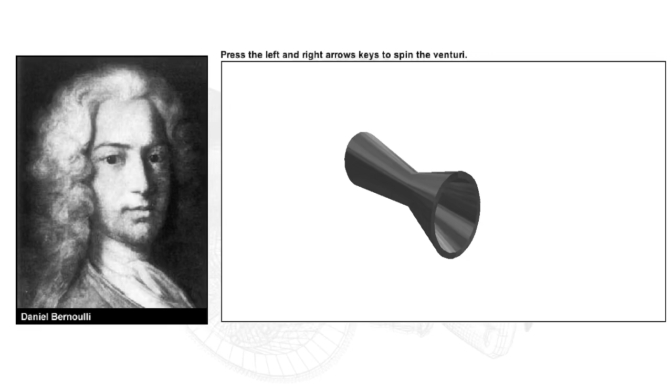Daniel Bernoulli, a Swiss scientist who was born in 1700 and died in 1782, discovered certain properties relating to fluids in motion. He expressed these properties in the mathematical statement that the total energy in a moving fluid or gas is made up of three forms of energy: the energy due to its height or position, the potential energy, the energy due to its pressure, and the energy due to its movement, the kinetic energy, and that in a streamlined flow of an ideal fluid, the sum of all of these is constant.

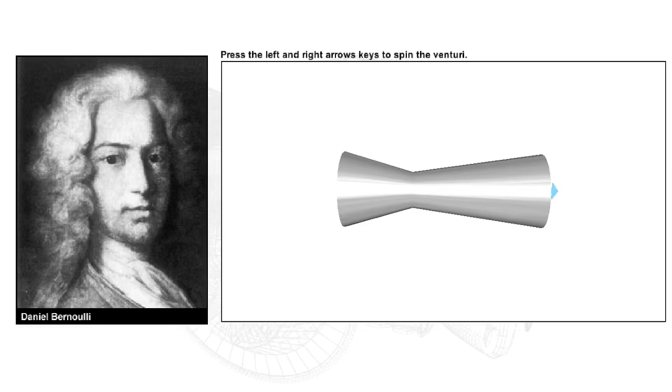If we just consider airflow as opposed to any other fluid or gas flow, the potential energy in that airflow can be assumed to be constant. Thus, we can modify the previous statement for all practical aerodynamic purposes by saying that the kinetic energy plus the pressure energy of a smooth flow of air is always constant. Thus, if the kinetic energy is increased, the pressure energy will drop in proportion so as to keep the total energy constant.

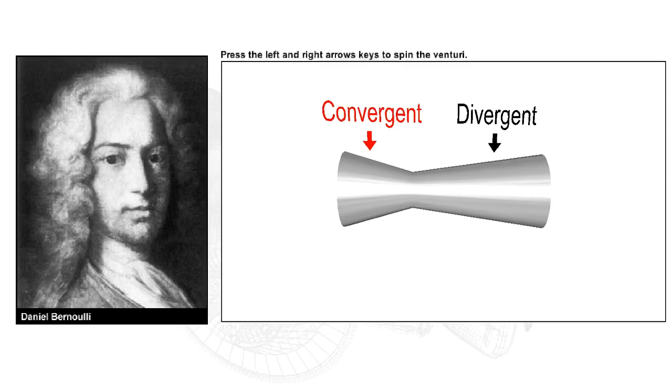A practical application of Bernoulli's theorem with which the pilot should be familiar is the Venturi tube, sometimes called a convergent-divergent duct, an example of which is shown here. The Venturi tube has an inlet which narrows to a throat, and an outlet section, relatively longer, which increases in diameter towards the rear.

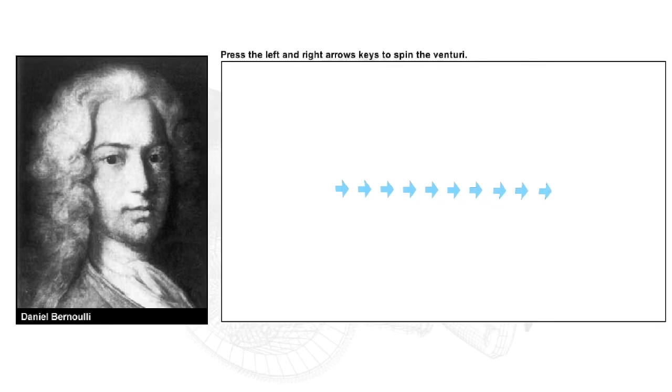For a flow of air to remain streamlined, the mass flow passing a particular point in a set period of time must remain constant. So, if a Venturi tube is positioned in such an airstream, then, for the air to remain streamlined, the mass flow through the Venturi must remain constant.

The mass flow is dependent on the area times the density times the velocity, and is a constant. This statement is known as the continuity equation.

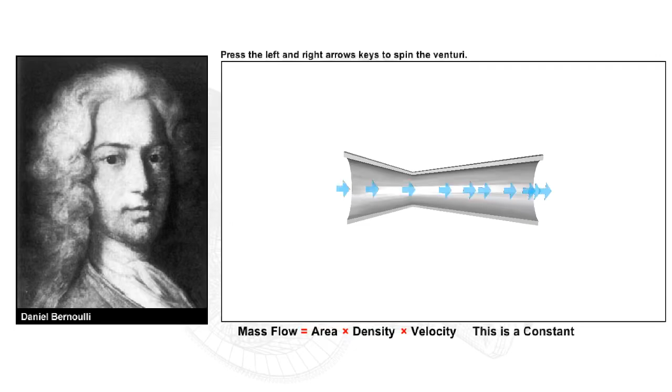Assuming that the density remains constant, for the mass flow to remain constant and still pass through the reduced cross-section of the throat of the Venturi, the speed of flow through the throat must be increased. Bernoulli's theorem states that this will bring about an accompanying pressure and temperature drop.

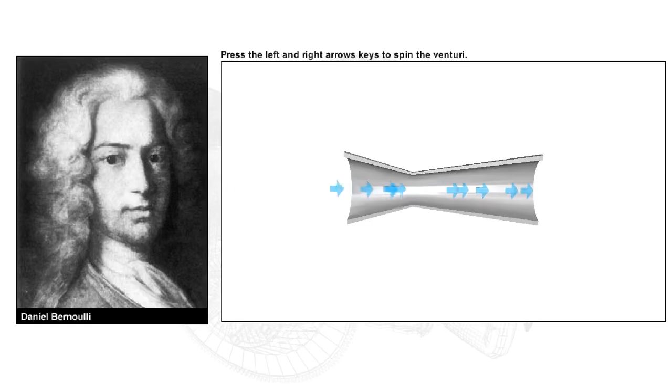Gases behave differently from the other two commonly studied states of matter, solids and liquids, so we have different methods for treating and understanding how gases behave under certain conditions. Gases, unlike solids and liquids, have neither fixed volume nor shape. They are moulded entirely by the container in which they are held.

There are three variables by which we can measure gases: volume, pressure, and temperature. We'll discuss two of the so-called gas laws which are most pertinent to the operation of the internal combustion engine: Boyle's law and Charles' law.

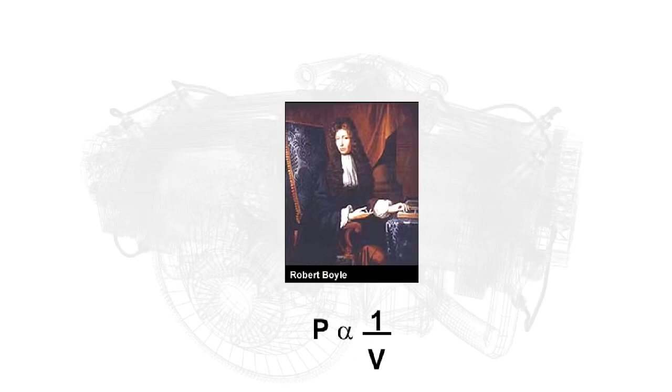Robert Boyle was born in 1627 in Ireland. He made important contributions to physics and chemistry, but is best known for the law which was named after him concerning an ideal gas.

Boyle's law states that, in a gas which is held at a constant temperature, the volume of that gas is inversely proportional to its pressure, or pressure times the volume equals a constant. This holds true where P is the absolute pressure of the gas, and V is the volume occupied when the pressure is P.

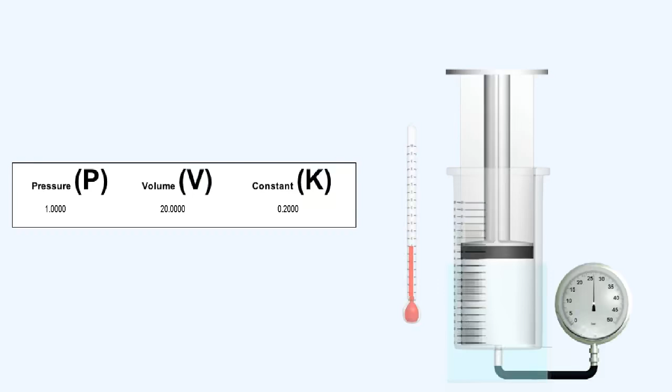This is a reproduction of an experiment carried out by Boyle. He had a calibrated syringe filled with air and deduced its volume. While taking care to retain the temperature of the air inside the syringe constant, he increased the pressure and decreased the volume inside it by placing weights on its plunger, taking readings as he did so.

You can see that by multiplying the volume by the pressure, the answer remains a constant. Hence, the product of the absolute pressure and volume of a given quantity of gas is constant as long as the temperature of the gas does not change.

Try moving the plunger up and down yourself to simulate changing the weight on it, and note that the result of P times V always remains a constant.

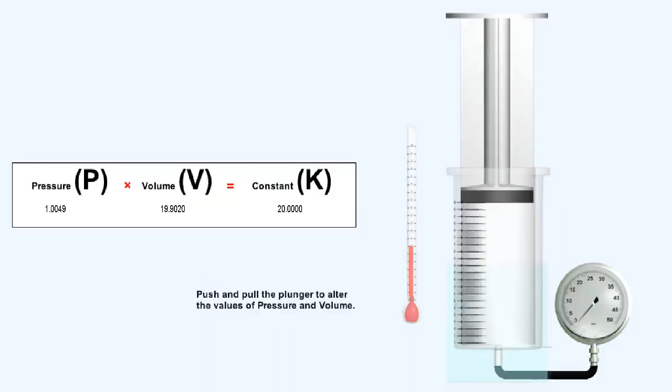Because of the interest in hot air balloons in the early 1800s in France, Jacques Charles and Joseph-Louis Gay-Lussac made detailed measurements on how the volume of a gas was affected by its temperature.

Just as Robert Boyle made efforts to keep all the properties of the gas constant except for the pressure and the volume, so Jacques Charles took care to keep all properties of the gas constant except for its temperature and volume.

Charles' law, or Gay-Lussac's law, states that if any gas is held at a constant pressure, its volume is directly proportional to the absolute temperature, or, if stated as a formula, the volume divided by the temperature is a constant.

Just as we did to demonstrate Boyle's law, we'll replicate an experiment similar to one carried out by Jacques Charles. If we partially fill a calibrated syringe with air and place it in a container of water, then by increasing or decreasing the temperature of the water, and thus increasing or decreasing the temperature of the air inside the syringe, while taking readings of the volume and temperature, and then dividing volume by temperature, in degrees Kelvin, we see that the answer is a constant. Remember that, in theory, the pressure inside the syringe remains constant also.

Try changing the temperature of the water for yourself, and notice that the result of the volume divided by the temperature remains a constant.

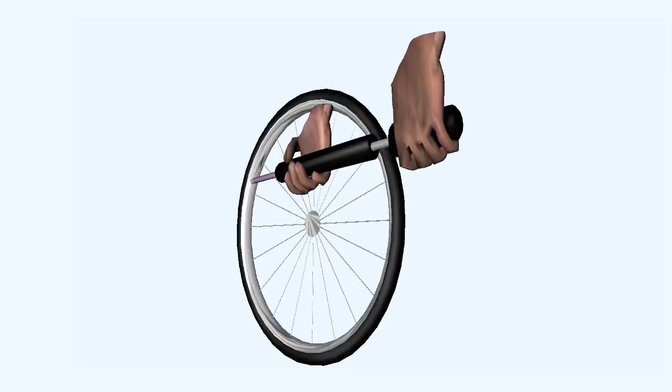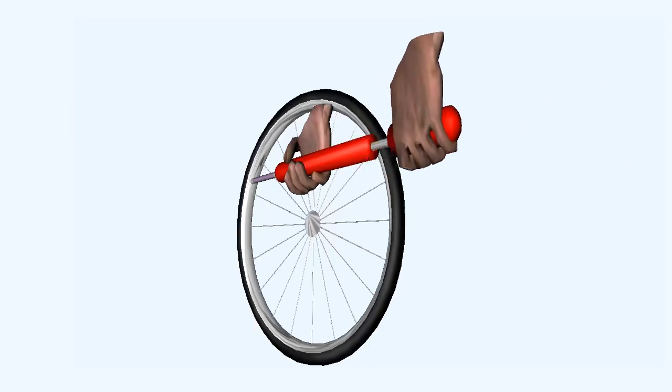Although both Boyle's law and Charles' law work in theory, we are unable, with existing technology, to make them work in practice. For instance, it's impossible as yet to increase the pressure of a gas without increasing its temperature, because of the adiabatic heating which inevitably occurs. Remember the example which is consistently quoted of how a bicycle pump always heats up when air is pumped into a tire.

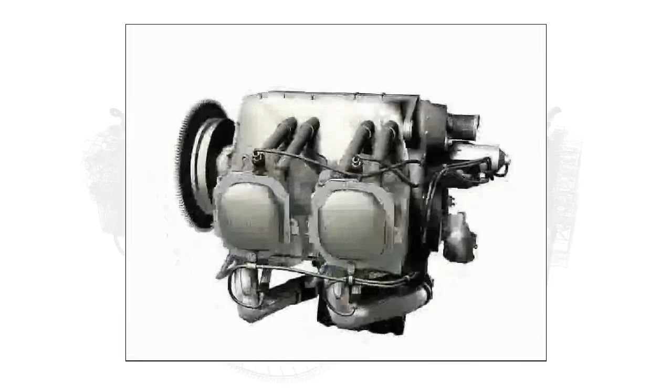By using Boyle's and Charles' law together, we get a practical method of determining what is happening to the gases inside the internal combustion engine, where temperatures, pressure, and volume are all changing constantly. With the scientists' usual lack of imagination, they've named the integrated Boyle's and Charles' laws the combined gas law.

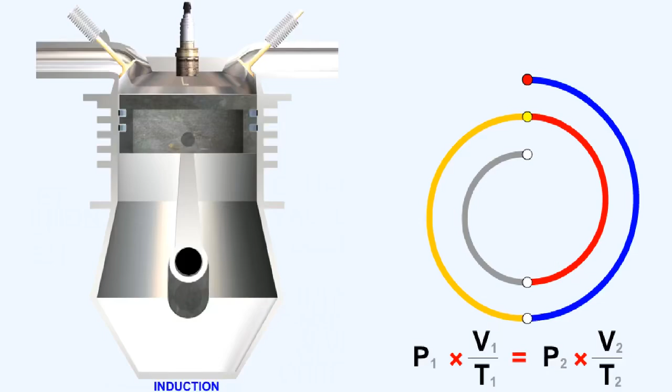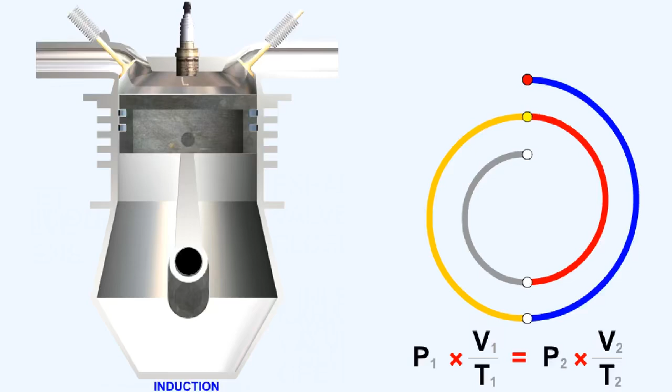The combined gas law represents the relationship between volume, pressure, and temperature. This relationship indicates that for any two given conditions within the engine, which we may label condition 1 and condition 2, pressure times volume divided by the temperature is a constant. This is commonly shown as P1 times V1 over T1 equals P2 times V2 over T2.

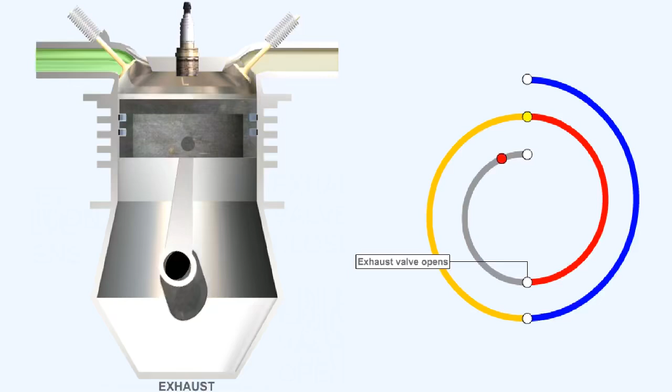The changes in pressure, volume, and temperature within the engine cylinder as the piston moves between the top and the bottom of its stroke are illustrated in the following animation of a purely theoretical engine. In a practical engine, both the valve and ignition timing has to be radically changed if the engine is to have any chance of running at all.

On the induction stroke, the piston moves down, increasing the volume available for the incoming mixture, and the pressure inside the cylinder thus reduces. Use the repeat button to show the process again.

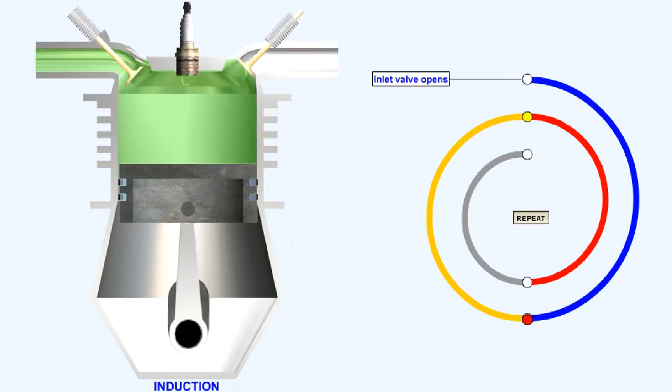On the compression stroke, the cylinder volume is reduced. Because both the inlet and exhaust valves are closed as the piston rises, the pressure inside the cylinder increases, as does the temperature. Use the repeat button to show the process again.

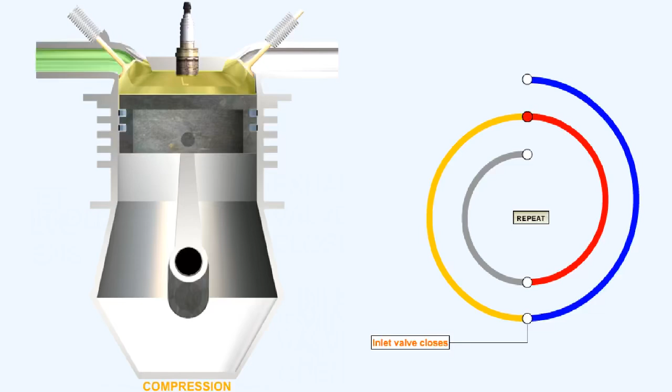In this theoretical engine, combustion is assumed to occur instantaneously at top dead center. Because of this, the engine is said to be a constant volume engine. However, as we shall learn later, in the practical engine, combustion actually occurs relatively slowly.

The power stroke in the theoretical Otto cycle starts with the mixture being ignited and simultaneously burning with the piston at top dead center. The resulting initial rapid rise in temperature expands the gases, increasing the pressure in the cylinder, driving the piston down. Subsequently, as combustion ceases, the volume of the cylinder increases, the pressure will fall, and with it the temperature. Use the repeat button to show the process again.

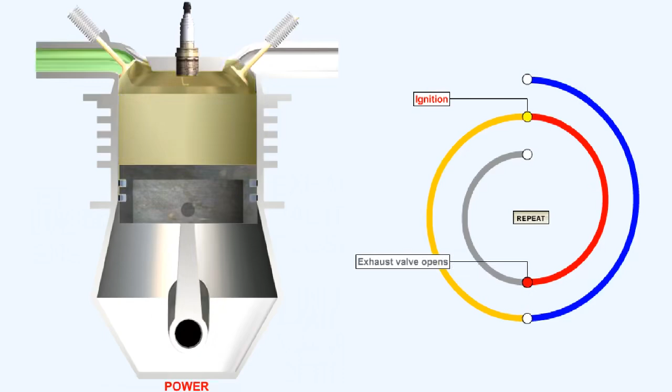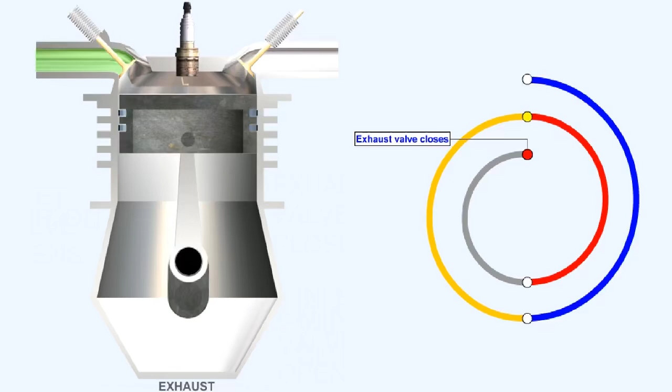On the exhaust stroke, momentum keeps the piston moving. As it rises, the volume inside the cylinder decreases, and even with the exhaust valve fully open, the pressure will rise slightly as the piston ascends to expel the gases to atmosphere. This will cause the gas temperature to increase slightly. Use the repeat button to show the process again.

This is the end of the first sortie into the mysteries of the internal combustion engine. In the next lesson, we'll investigate a few more definitions and then delve a little more deeply into the way the piston engine is built.